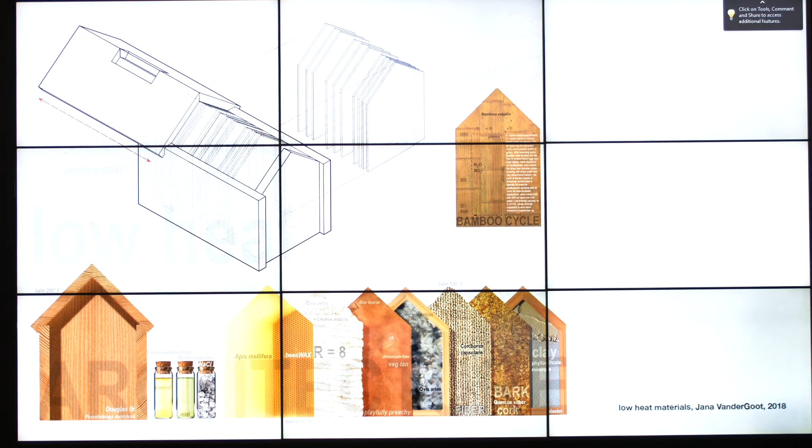There are a lot of low heat building materials that can be found in the forest. Not all of the building materials shown here are forest materials, but certainly wood is a material from the forest, and it's a material I consider low heat, which means it has a comparatively low embodied energy, it's non-toxic, and it can even sequester carbon or deflect carbon from the atmosphere.

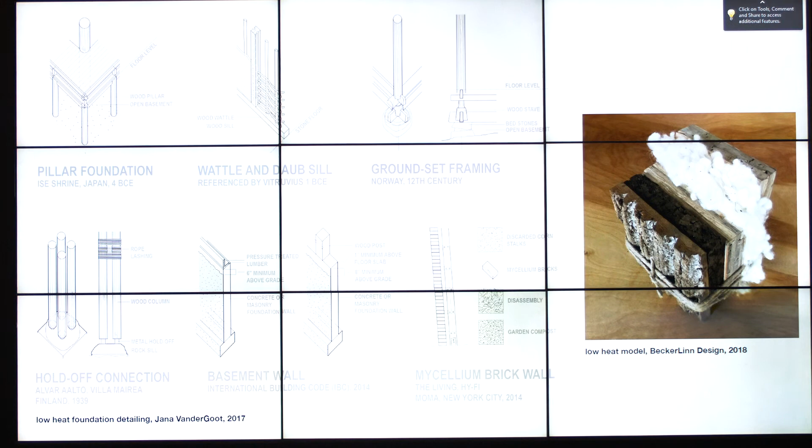So my more recent work involves low heat materials, and I wanted to bring that into this discussion of the book to keep the conversation current. I think the idea of low heat isn't necessarily a new one—I'm not really the first to talk about the phenomenon. I like the term low heat though, because I think it describes something more current.

If you look at these examples of different foundations, some are very ancient, Japan 4 BC, this pillar foundation, but there's a super rich history of building with low heat materials. And it definitely involves craft, because low heat materials are not necessarily permanent materials. They can be quite temporary, and sometimes the fact that they're temporary is a bonus. So I wanted to show the spectrum of projects that represent this idea of low heat urbanism.

So that's a little bit of a tangent, but it's kind of the latest conversation. So back to the book, 21 case studies.

I'm just going to flip through a few pictures of the case studies. I can't really talk about them all today. I've cherry-picked a few that I think might spark conversation here at this school, and I'll talk about those. But I wanted to flip through some of the ones I won't be talking about.

One of the chapters in the book is about cross-laminated timber, the first CLT skyscraper. How many of you have heard about cross-laminated timber? Yeah, it's being talked about a lot these days, especially in the discipline of architecture. I thought it was interesting to talk about the first CLT skyscraper and what kind of building codes needed to be written to accommodate this in London.

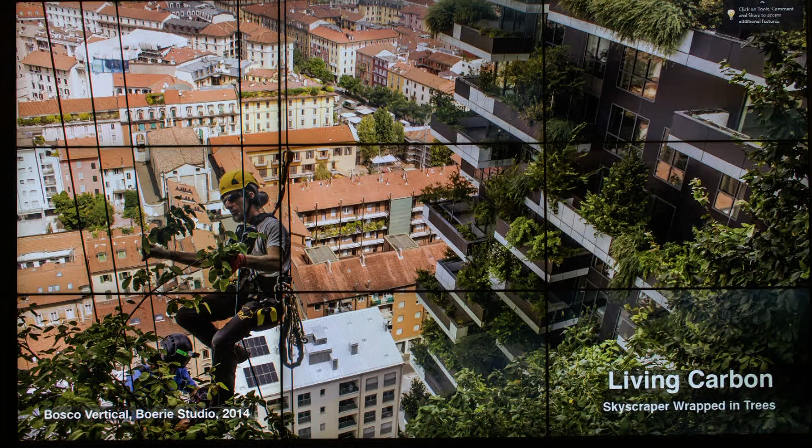Then there's Bosco Verticale, which is, I would say, the first skyscraper wrapped in a forest or wrapped in trees, and I talk about it as living carbon. It's carbon that's alive. The trees or the plants haven't been harvested, or the carbon is still being absorbed.

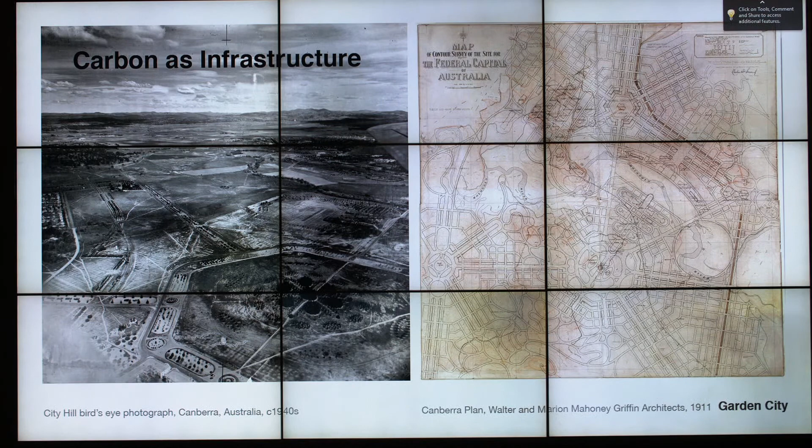Carbon as infrastructure. This is a historic project, the city of Canberra. We learn about it in our architecture survey courses, but I don't ever see it talked about as forest infrastructure. Usually it's talked about as the Garden City, designed by Walter and Marion Mahony Griffin in 1911. But there's this alternate history of the city, that before anything else was built, trees were used as the survey pegs for the city. And today, the trees function as a very important kind of infrastructure. So that's carbon as urban infrastructure, or trees as urban infrastructure.

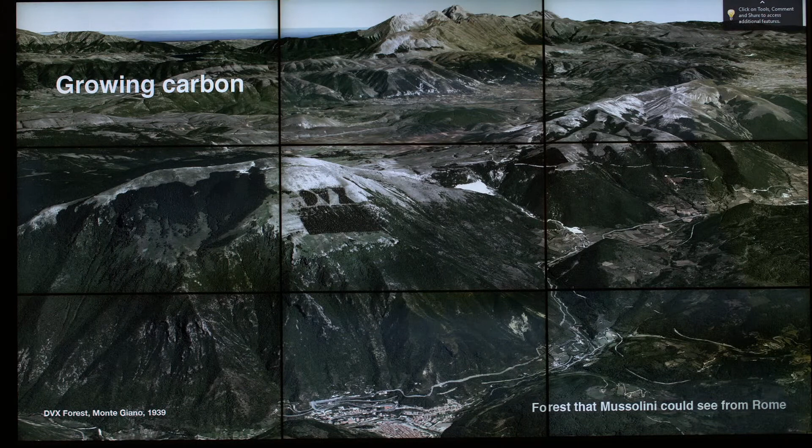Growing carbon, this is an example of this really bizarre forest in Italy. A forest that apparently Mussolini could see from Rome, which is great because those are his initials, Il Duce - those are his initials. So that was one of the projects in the book.

So, a brief view of some of the case studies in the book that I won't talk about today. They're from all over the world, and I didn't necessarily choose them to fit within any particular biome. I chose them because they all brought up important topics.

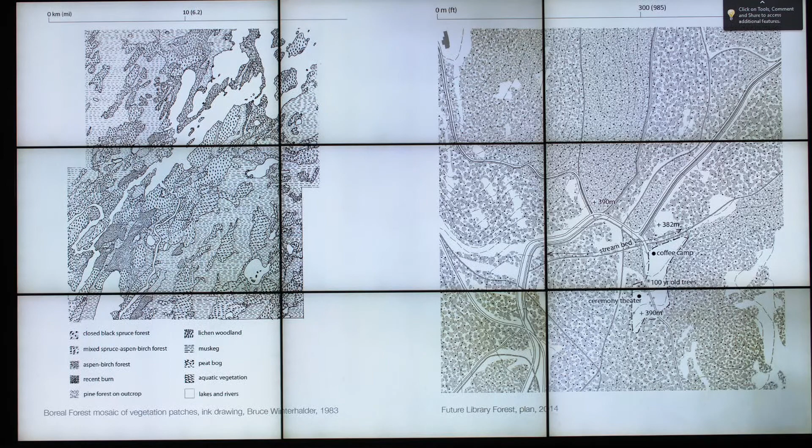On the right is thinking of the canopy of a park as a continuous field that has a texture and a grain. There's a waterway that runs through the park, and the denser canopies—the conifers and evergreen trees—follow that waterway.

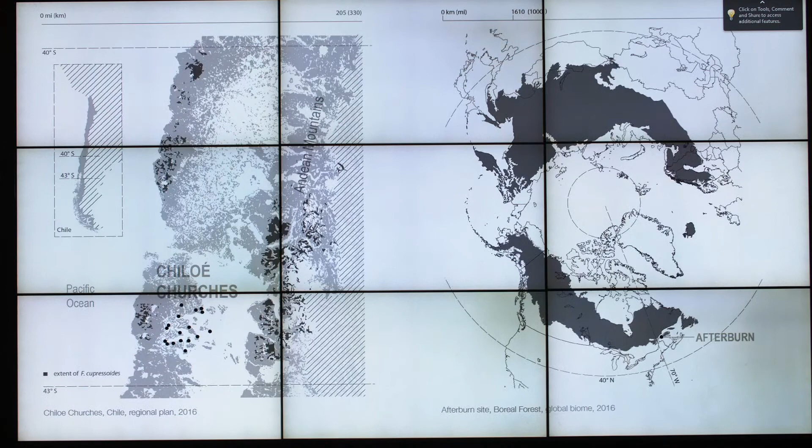I'm going to skip these for now, but there are plan drawings at different scales as well. So those are the drawings in the book.

The foundational theories from the book, I tried to draw from different disciplines. Many of you probably know Stan Allen, an architect and theorist who, about a decade ago, was very interested in field conditions, has written on that, and talks a lot about the forest as a metaphor or inspiration for urban design.

So I talk about Stan Allen's work in the introduction. Ian McHarg, who was an ecological planner at the University of Pennsylvania—we just celebrated the anniversary of Design with Nature, probably his best known publication—talks about creative fitting.

I like that term, and I'm suggesting in the book that as humans, we really do live with the forest. If we're going to design environments that fit, we need to consider the forest as part of our building material. So I'm calling on the discipline of ecology.

And then also looking to landscape architecture and architectural design, referencing Elizabeth Meyer from the University of Virginia. She discusses the performance of beauty. One of the things I suggest in the book is that not only do we live with the forest because we breathe—

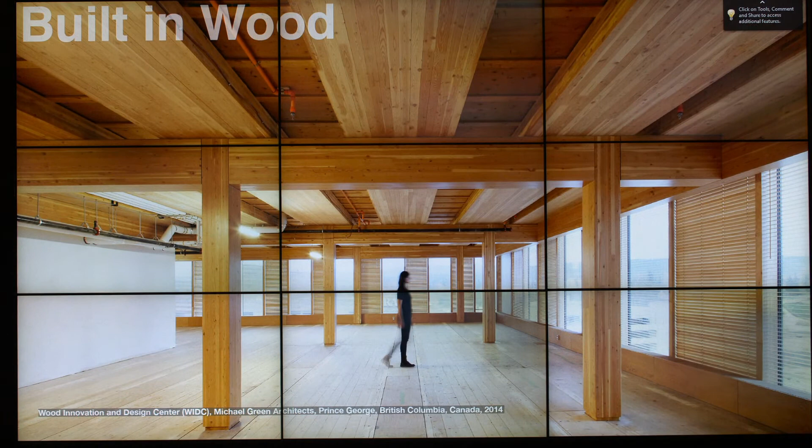When agriculture was more present on this site, those stems were used for things like building fences or fodder for feeding animals. They were really valuable. And nowadays, that practice of coppicing and the smaller diameter trees are no longer considered valuable, they're waste products.

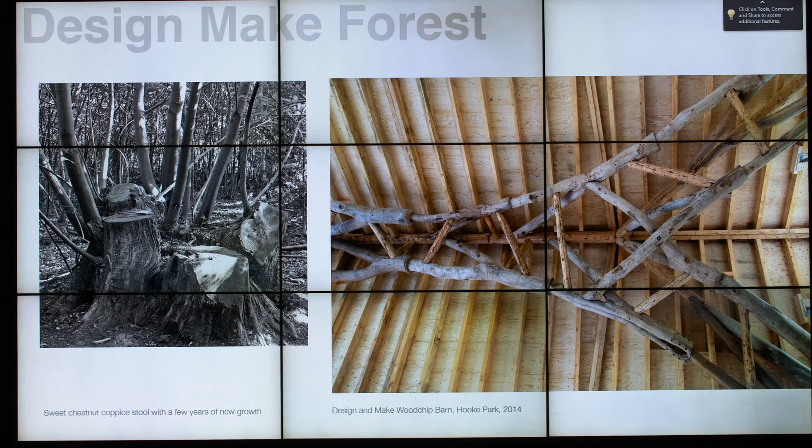On the left, you see an example of coppice, sweet chestnut coppice. On the right is one of the projects from Hooke Park, and you can see that structurally there's some pretty painstaking details there. But I think the takeaway for me in this project is trying to find an economy or a use for this waste product, what is now considered a waste product from the forest.

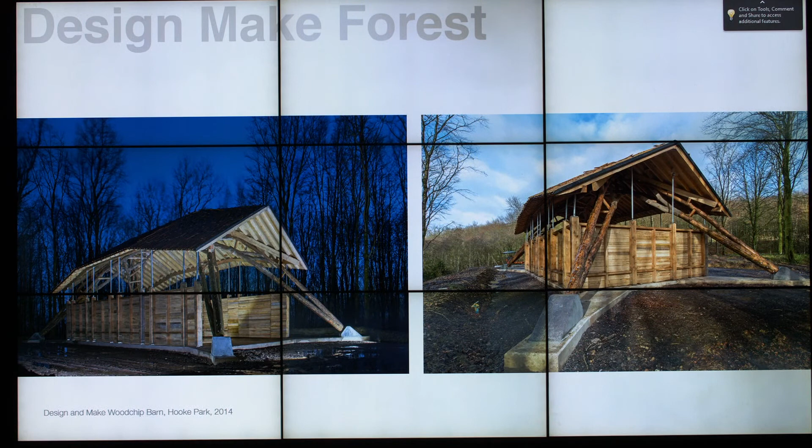Here's another project where they're using green wood and constructing with it. The big shed assembly building is made all out of these scantlings that are basically, to keep a forest healthy, you have to cut or thin out the trees that are crooked or not doing well. So you see a bunch of these waste trees there, and that's what they use to construct these buildings.

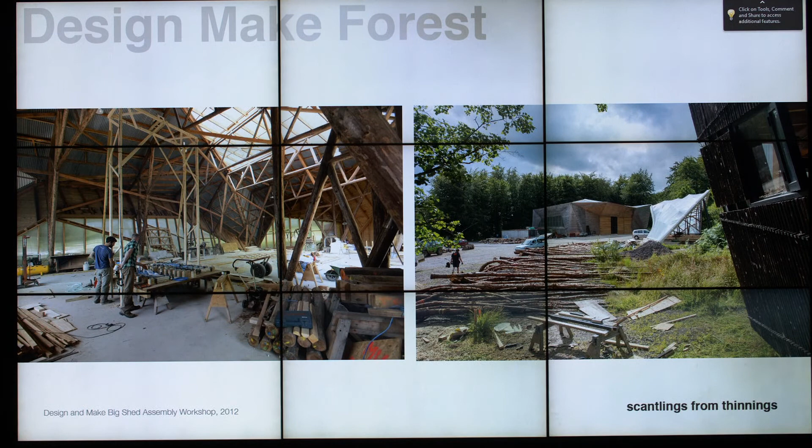The beautiful thing is that they have to deal with these irregular structural forces within the scantlings. So what happens is when they join the wood together and they create a structure that has good logic, they end up not with a square building, but a building like this.

And I think it's beautiful because the building really almost literally represents the structural logics of the forest itself, right? The branching of the canopy, the branching of the trees. So I think there's something also quite poetic there, on top of the fact that they're trying to create new material economies from the forest.

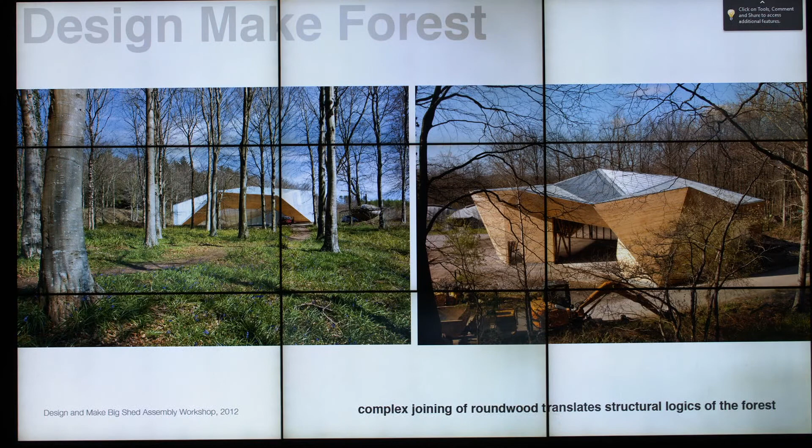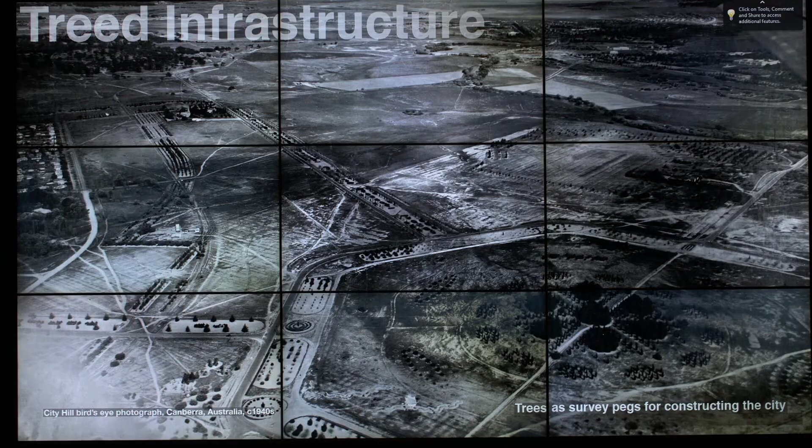The next case study is about public space, and the design tactic here is, I call waterlogging. And I'm going to actually skip that. So this design tactic is connected to the Bos Forest in Amsterdam in the Netherlands.

Up on the top, the kind of semicircular form, that's old Amsterdam, and highlighted in red is the Bos Forest. What you can see in this historic map is that the entire country is constructed out of these polders, or these long, thin pieces of land. Many of you probably know the Netherlands is a country that's well below sea level.

And so they have this long history of constructing land and water, and they do it with trees. They do it with trees both in old Amsterdam, where you see buildings and, more what you would say traditional, conventional urban design, but they also construct landscapes with this technique called waterlogging, that I'm calling waterlogging.

So they build the architecture in the forest the same way, and they do it by taking logs, submerging them into the ground, and then very carefully engineering the water levels with canals and dampers. And so you see that Bos Park went from this polder system with canals to something that doesn't look like the polder system. It's a planted forest.

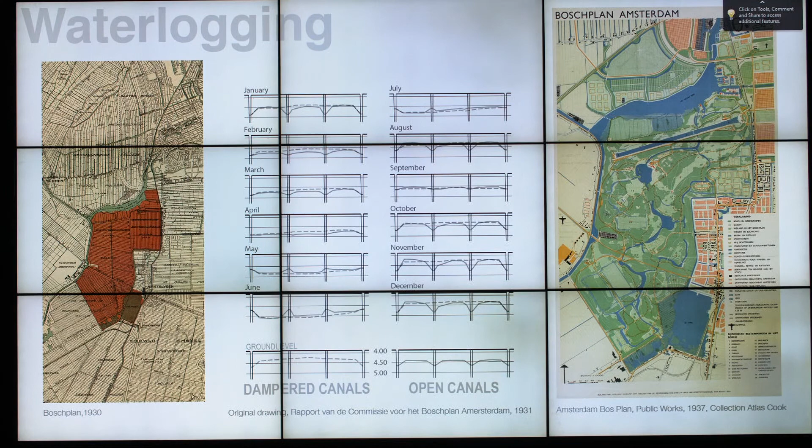And how did they achieve that? How did they make sure the trees would grow and the roots wouldn't drown in the water? They had to carefully engineer the water levels in the soil.

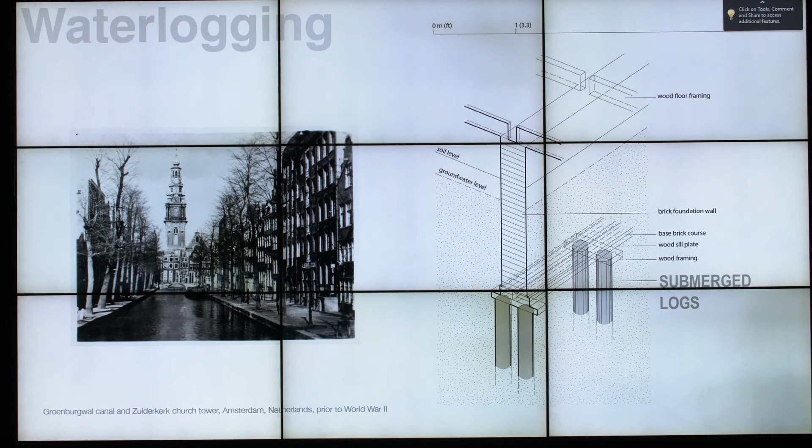In old Amsterdam, they also do waterlogging, but it's almost the reverse, where the logs that they sink into the ground have to continuously be submerged in water or they rot. So while the forest has to not be submerged in water, the buildings have to be submerged in water. It's all about creating these canals and doing this careful engineering.

On the left, you see waterlogging: historically, a group of people driving a wood pile down into the earth by hand, and then later the steam pile driver, to create the foundations of the buildings. On the right, you see workers doing exactly the same thing to build the forest. They're putting these live logs down into the water, and in both situations, they're engineering the water levels.

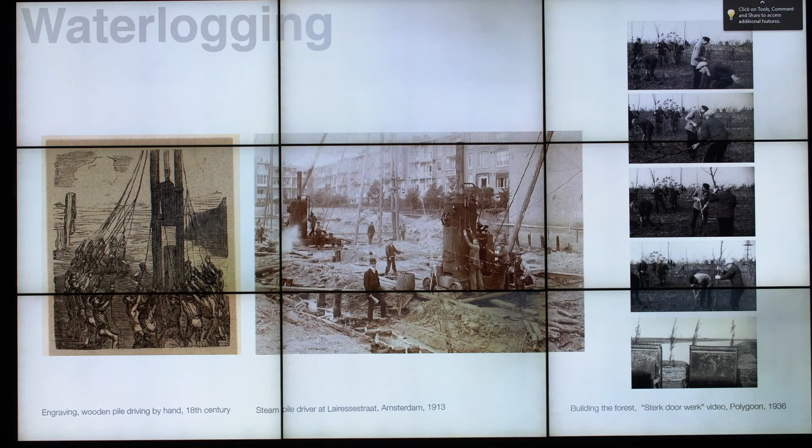So I call waterlogging this very familiar construction technique used in the Netherlands. And I connect this particular construction technique to an idea about the heempark, which in the Netherlands is like a folk park, a park made for just regular people. It's made as a place where anyone would feel at home, not just someone who can pay an entry ticket. So I'm trying to connect waterlogging to this idea of public space in the Netherlands as a construction technique.

The last case study, the design tactic, is what I call the vertical forest biosystem. This case study project is Bosco Verticale in Milan. How many of you have heard of this project? Yeah, it was interesting when I was writing the book - I kept seeing this project again and again on all of the architecture websites, because architects have been drawing these pictures of green fuzzy buildings forever, and somebody finally figured out how to build it in the middle of a city.

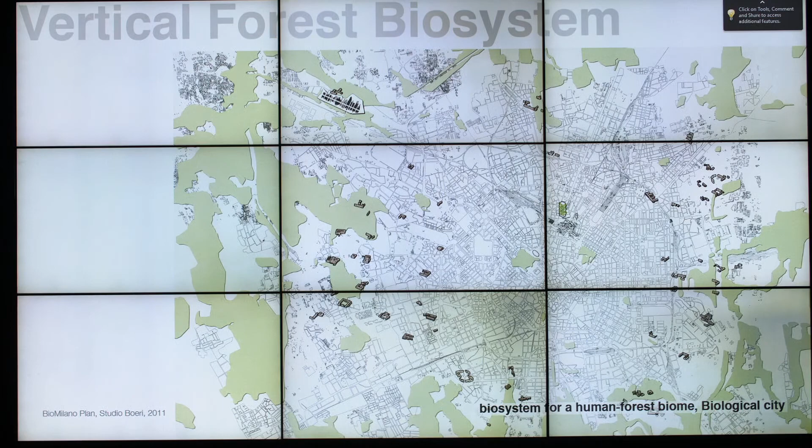They recognized that in this era, there's a new biome that's emerging, and that's the biome shaped by humans - it's prolific, it's everywhere. What they were designing with Bosco Verticale was a biosystem that could function in a new kind of human forest biome. That's what they were trying to envision Milan as, a new human forest biome. They had lots of different tactics, including building out the metro forest, but Bosco Verticale, those towers, were just one piece of this larger vision of a biological city.

They envisioned that these towers could function almost like obelisks - these icons or markers located at key metro stops that could help create this new vision for the city. Here I think the aesthetic piece of it is important. Even if the forest biosystem is such that the trees really are intensive care patients, and there's not much diversity in terms of species, I think there is an aesthetic function, and I'll talk about that later - I think that's important.

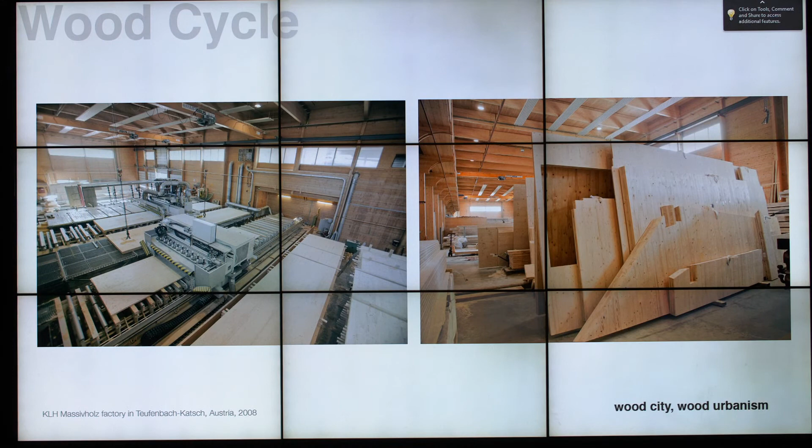I also appreciate the conversation that the towers bring up, because it's a larger conversation about a city built in wood, and wood cycles in urbanism. So these are some images of CLT, and I think that has emerged as a really important new construction technique for our cities.

Boeri Studio was envisioning CLT as part of their scheme as well. They wanted to show that the industry that goes along with wood urbanism is a quiet, soft industry that could be co-located with things like housing. It's not an industry that has to be far away because it's toxic or super loud. I think that's really important.

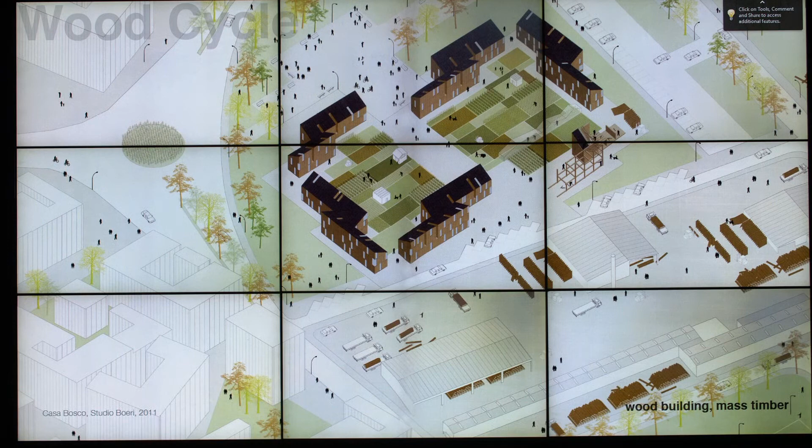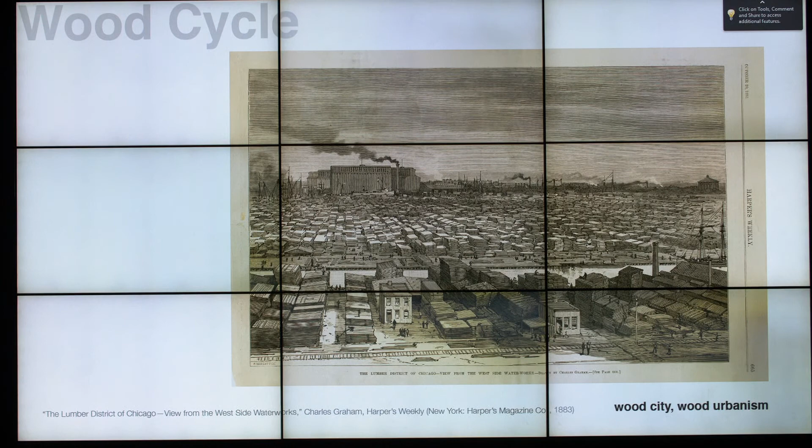So they started to envision these adjacencies as part of the larger vision of the city, which is different than, say, the wood urbanism of the 1800s in Chicago, where it's kind of a monoculture of wood, right? Nothing else is happening there, no housing or other programs.

I did talk about, I think the vision is bigger than what actually got built, but that's okay. They had a vision that the building would have a hydrology, a water system where gray water could be recycled and used for irrigation. They never got that far, but I think there's great potential in that idea, and I hope someday they are able to achieve that.

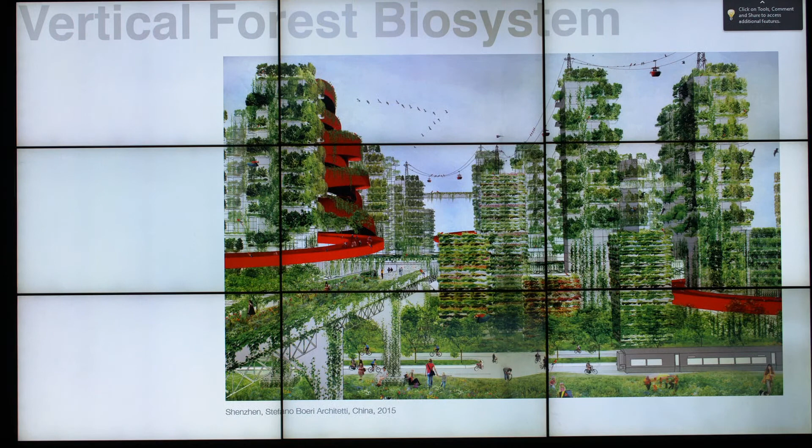That Bosco Verticale really is a test to see how uncomfortable people will get in this new biome. And it's interesting, they said they weren't that interested in sustainability, they were interested in diversity. They have a diagram in one of their books of all the different species, and cockroaches, ticks, and rats are included, because when you have trees and water, you're probably going to have more mosquitoes. You might have ticks. You might have more wildlife, and with that come all these other things.

So, are we interested in that? Are we truly interested in that? The messiness. What if the answer is no? I mean, my mother says no. Yeah, no to ticks and no to mosquitoes. I do too. I do not like picking ticks off my kids, right?

So I think that's why it's a great project. I think it remains to be seen if it's palatable, right? It's a test to see if the real estate will sell. One of the tests too was getting a developer to build it, to give up that much real estate to a tree tenant, right? They somehow got around that and convinced a developer that it made economic sense. But now the inhabitants will also have to kind of vote on it.

But I want to end with this image because there's this interesting phenomenon happening, and that is the image of the city of Milan is shifting. Bosco Verticale has shifted the image in Porta Nuova, which is right off one of the metro stops. The first thing you see is this totally different silhouette. You never see that silhouette. Skyscrapers don't have that furry silhouette, right?

And it's allowing other people, neighbors, to kind of test it out too. So there's a building now that's completely covered in ivy, and you can see the apartment. They're letting the green overgrow, and it's a different aesthetic. It's really the image, I think, of a more biological city. So that's it.

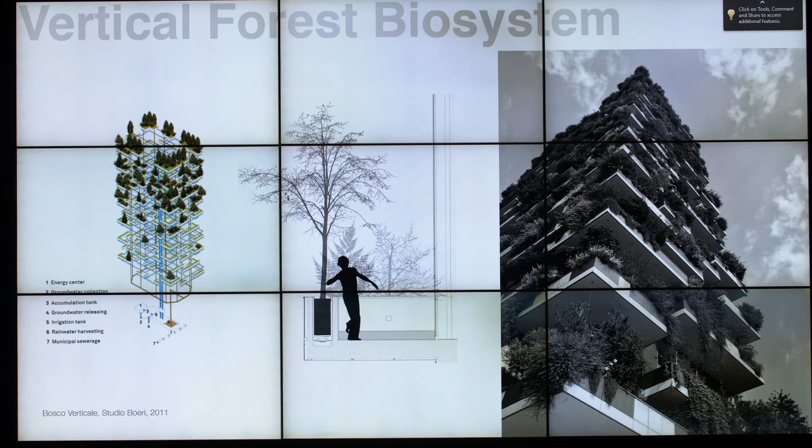I just question those concrete cantilevers, holding dirt. I've done buildings where I had to hold dirt on the roof, and that's crazy. This building was really expensive to build, so you have to ask, is it worth it? Engineering gymnastics just to do something you should do with a very simple structure.

That's my opinion. And I think that's why I go back to this case study where you have a plant that has really limber limbs, that requires very little soil and no water to grow. It grows on its own. It's persistent, it's weedy, it'll show up anywhere, but it does have a lot of ecosystem value.

It's filtering the air and noise, and has some wildlife value. I don't know if its roots are invasive—that would be a good question. But I think Hundertwasser was a person who was also really concerned about the maintenance and the viability, and didn't want to spend a ton of money on the structure.

Yeah. Oh, okay. In your opinion, do you see

In your opinion, do you see the vertical forest biosystem becoming more prevalent in the near future?

I think it's a popular idea. It's kind of gimmicky sometimes. The reason I wrote about this project is I do see it everywhere. Now Boeri Studio is building a couple more, and HOK built one in Sri Lanka. So you are starting to see it more.

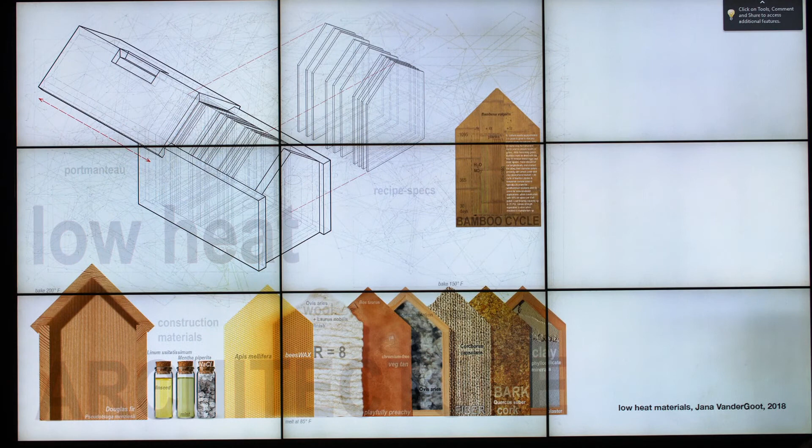I think it's connected. We don't have to literally have the forest be—we don't have to have the forest be literal in the buildings. We can definitely build with the materials of the forest. I like to think of indigenous construction as all low heat—it's actually super sophisticated, trial and error, figuring out how to use these unprocessed raw materials in a smart way so that the buildings last. Or like in Japan, at the Ise Shrine, saying the buildings aren't gonna last—we're gonna use these materials, we know they're temporary, and part of the culture is to rebuild it every 20 years, because that's a value to human culture. So I think there's a lot there.

I didn't do it justice, but I tried. If your student is interested in digging in, the first sections of the book Built in Wood have three case studies there, and then Decomposition—those deal more with the actual materiality of the forest.

So whether it's charred wood or mycelium bricks—which are like mushrooms, the wood has to be decayed, and then that becomes this construction material—or different species, like on the East Coast the use of cedar shingles is just so beautiful. It's indigenous, and it's a wood that can do well in salty marine environments, and there's a certain way to craft the shingles. So yeah, I think going back to the craft, the vernacular, is one of the best things we can do in this conversation.

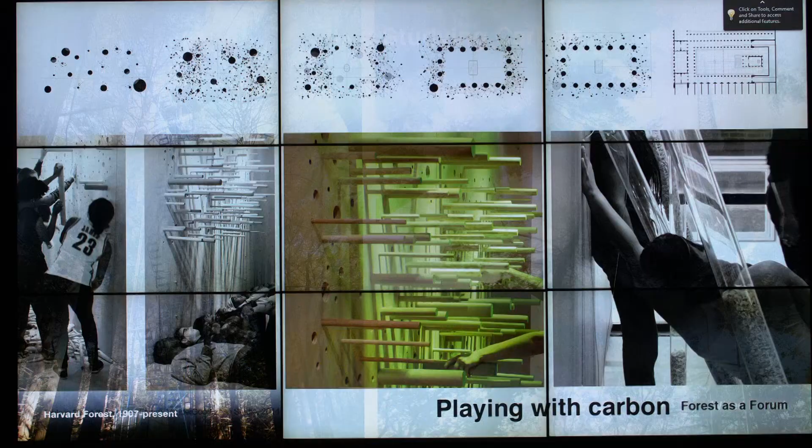Yeah, I think that's a super important question, and it was one of the things I played with a little bit in a very cerebral way in this exhibit, the Forest as a Forum exhibit, which was that one of the best things about architecture is its signs of use and wear. When you see muddy or handprints or where a door has worn, that's beauty. So one of the things is the aesthetic idea that a worn building is not necessarily an unmaintained or bad building. There's that.

But then there are real maintenance concerns too, I think. And that's where I'd go back to the Hundertwasser tree tenant, or the spontaneous vegetation. I think if we're thinking about the forest aesthetic, we have to be really smart about the species we're choosing, because there are species that follow humans, the ones that can survive in the chaos that we create.

I don't know exactly how that translates to buildings, except to say that going back to vernacular indigenous architecture, some of those structures are quite temporary and can be put up in a day by a group of people, and then they go into decay, and that's fine. Then you build another one, and another one, and another one. So maybe there's this idea of maintenance as letting it go into ruin, and then it sits there, and there's not a building there for a while until people decide to build it again. I don't know, but I'm going to think about that question more because I think it's really critical, and I don't quite have an answer.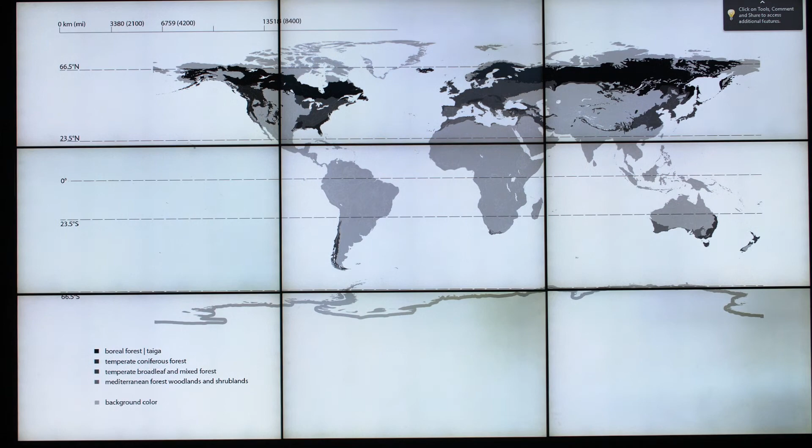Well, this doesn't look like a very active drawing, but here's what happened. I chose the case studies from my running list, and one day I decided to make a global map, locate them all, and make sure I had examples on each continent. So I made this map, and then I got insecure that I didn't have any examples in the tropical biome. I thought, should I go find one? Then I noticed everything was actually in the temperate forest biome—something I hadn't considered. That helped me refine the idea of the forest aesthetic: it really only applies to that biome, because that's where all the projects I was seeing were succeeding. As mundane as these two drawings are, I think they helped me define the forest aesthetic.

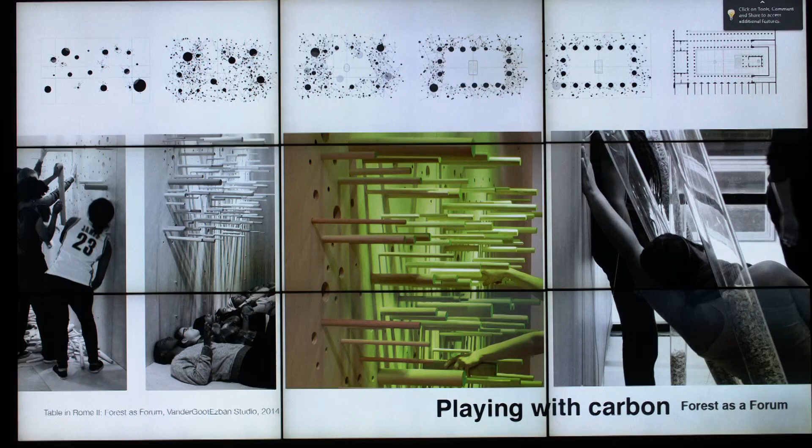What about the one right before it, the exhibition drawing? Oh, wait, maybe it's not the one right before—this one? Yeah, right. This was interesting. When did I do this drawing? I did it after the exhibit, like an as-built drawing. In the original book there's the beginning drawing of the exhibit, the floor plan my students and I came up with.

As the exhibit went on, I realized something interesting—the first couple of days my TAs took everything that had been moved and put it back. I had to tell them, don't clean up the exhibit, just let the stuff go out and take pictures. So they compiled all these pictures, and we sketched the different configurations every day. At the very end I made this drawing. Not everything is represented, but I tried to capture the moments we most wanted to clean up and had to back away from—like when there were tubes hanging from the ceiling, screwed in, and students figured out that twisting them made the trees fall over and the shavings inside spread everywhere. We just let it go.

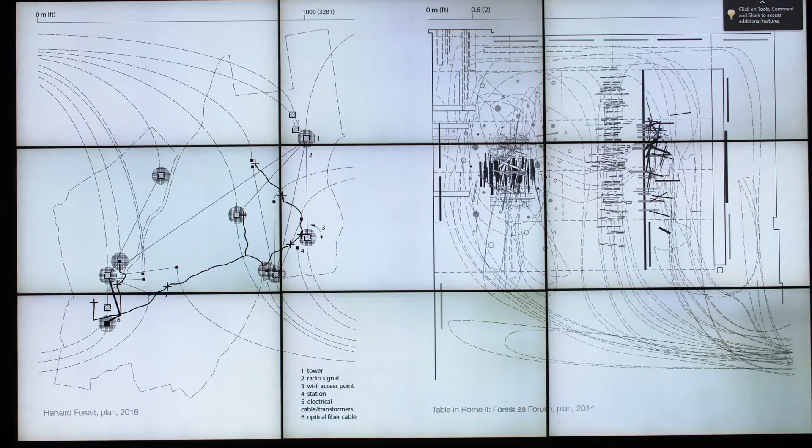I didn't actually show the shavings, but I tried to capture the most momentous occasions. What did I learn from this drawing? It was kind of an affirmation that the centers we designed—the wood wall and the altar with the video animation—were actually centers of activity. People did gravitate toward those centers. They might not have, but they did, so that was fun to see.

Oh, that word, affirmate, that's... Yeah, I kind of just went on and on, so I'll close it there. Thank you for that question. Good, I really appreciated that discussion. It was great.